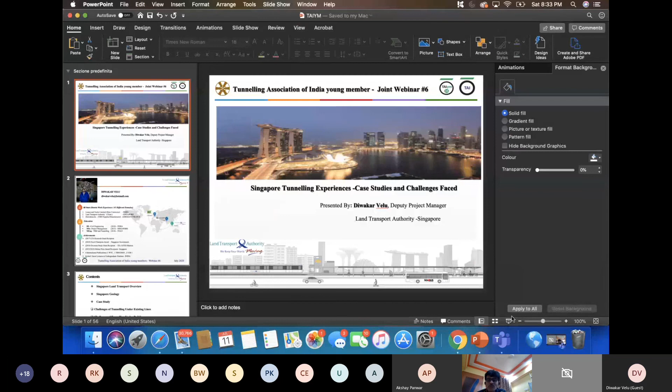Okay, basically I'll be sharing some of my Singapore tunneling experience. I've been in Singapore for the past 7 years, and as Akshay mentioned, I've been a part of these 2 critical projects in Singapore. So I'll be sharing some of the experiences from those 2 projects because I find those 2 projects to be keen in terms of Indian perspective, because it's based on a city-oriented location where there are a lot of challenges that you have to face and plan before you execute the tunneling works.

I'll just skip my introduction because I think Akshay has given a very good introduction. I've been for 8 years over in Singapore, and I've completed my BE in India and master's in Singapore as well as a master's in Turin. So that's the basic thing.

So I'll just go over to the next slide. The contents which I will be sharing today: I'll give an overview of the Singapore Land Transport Authority and what we do, what is the Singapore geology, because you need to understand what geology we have here and what are the challenges. Then I'll start with 2 case studies. One is, as Akshay mentioned, going under a parallel existing line, and another is tunneling under old shop houses which don't have any as-built foundations, and we have to look at the challenges going under such sensitive buildings.

In Singapore, they treat those kinds of buildings as historical buildings, and they don't want to disturb the architectural effect or damage those buildings. So it was a very challenging project. I'll touch on some ideas on how we managed those projects. In that, I'll cover what design we have taken, what mitigations were used, and how we tunneled under, along with some of the instrumentations which helped us manage those projects. I'll share those results.

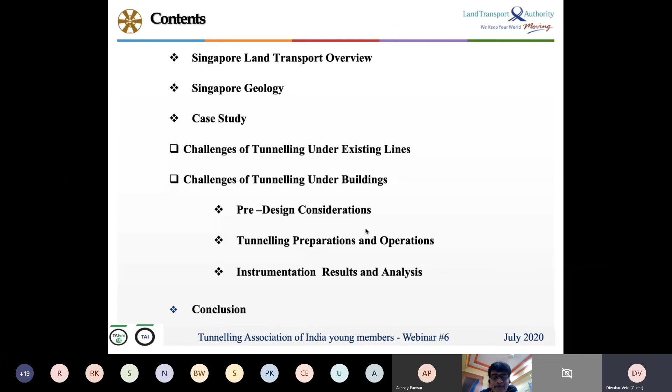So you can understand how the ground behaves for this kind of tunneling work in Singapore context, I'll conclude later on whatever we have seen. So basically, I think many people would have seen this.

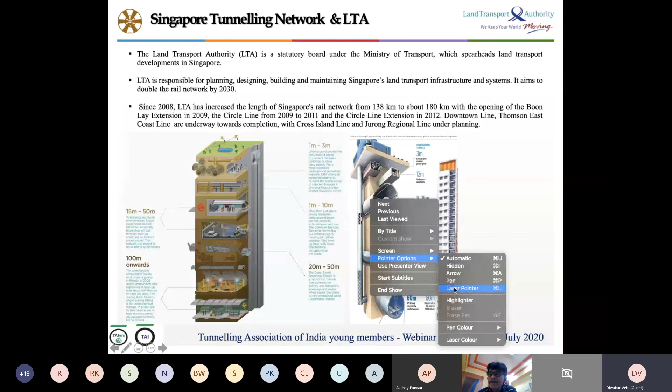This is Singapore's typical underground map. So we have about 50 meters below until there, we have tunneling. I think last week even Senthil would have shared the same thing. So basically, I am working more towards the metro lines, which are somewhere here. We work around 20 to 30 meters here, and most of the metro lines are in that area. The deepest is the Singapore power grid tunnels, and in between those are the deep tunnel sewerage systems.

So basically, this is a typical cross section, and whatever projects related to each authority, they mine under this kind of depth, so we don't come in contact with each other, and we have enough cover for the future lines. So typically, this is a cross section. If you can see here, this is for the utilities, this is for the road tunnels, this is for metro, and here is for the power grid tunnels.

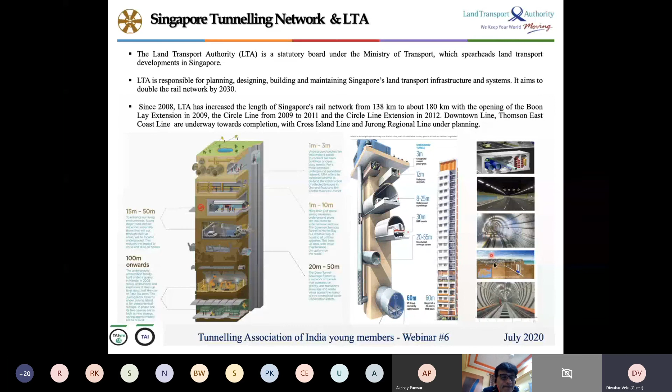Going to the future, what we can expect in Singapore, I wanted to share. We are expecting about 360 kilometers of metro lines. I am part of those lines. We have 2 new lines coming up, and also 3 extensions ongoing. Singapore is in a mindset that in future, every person within a 10-minute walk should reach a bus station or an MRT, so they have a very big plan ahead of us. We have a lot of job here, and it's going to be quite challenging. I wanted to share how Singapore is being prepared for future population and future developments going on.

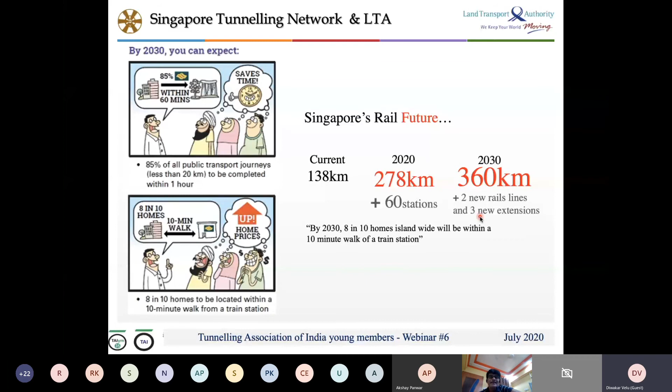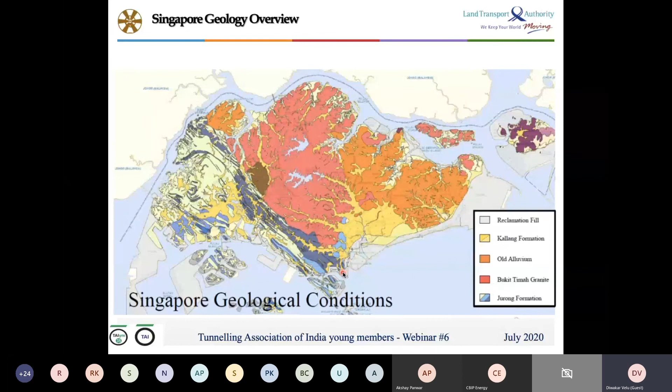You can mine very well here. This is more of a stiff clay, we call it OA, so this is a very good ground to mine in Singapore. If you get a project here, we'll be the happiest person to do mining here. Kallang, and this is the central business district, which is mostly reclaimed land, so this is a very challenging location to do a project because it's very, very soft, and majority of projects done here have to do a lot of ground improvement before we can start any projects there. So I'll give you an overview of how the geology looks in Singapore.

You can see this OA is more like a stiff clay, easy to mine, but it's a little abrasive, so you must be very careful with your cutter head selection and tools, and monitor very carefully. Though it's good to mine, you get a lot of abrasion on your cutter wares. This is the Kallang formation, a very soft clay, and you can just sweep in and go, you can hit about 15 rings per day. This is the Jurong formation, so it's kind of weathered rock.

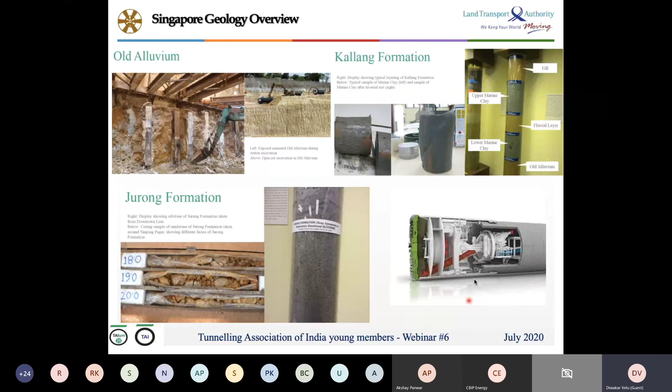So it is still good to mine, but you cannot get that much penetration rate. You have to carefully mine because sometimes it's weathered, sometimes it's good, so you have to be very careful. Mainly in these three kinds of geology, we choose EPB machines.

Coming to the next part of the geology is this Bukit Timah granite, weathered and full face Bukit Timah granite rocks, around the north side of Singapore. These are very good rocks, and mostly we choose slurry machines for this kind of project. So now you'll have a better idea of what the geology is in Singapore. These are the 5 main geologies which are more predominant in Singapore, where you have to design the tunnels for this kind of ground.

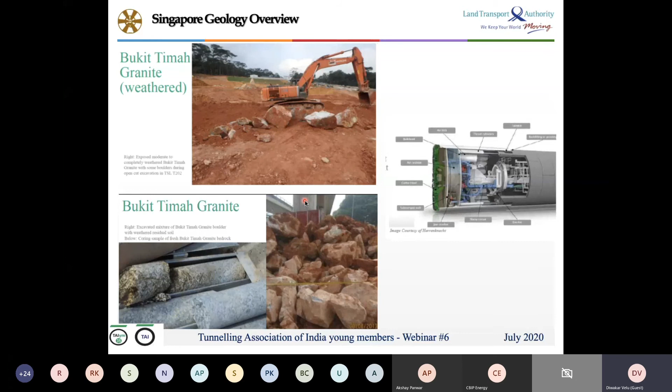The last one is the reclaimed land. This is how Singapore's reclamation, the central business district, was looking long back in the 90s, and now it is what you see, the typical CBD district of Singapore. This whole area was a swamp, and they had to fully reclaim the whole land.

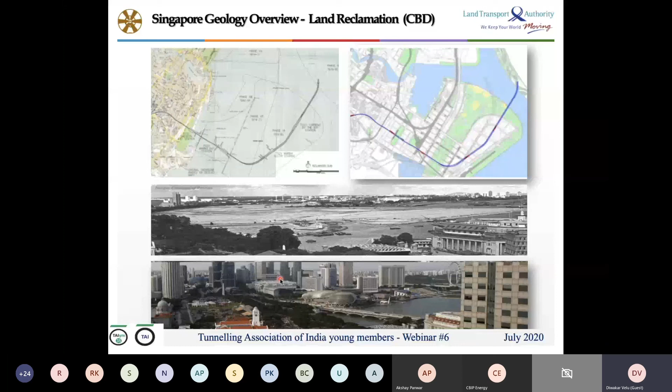Majority of the offices are here, and majority of the interchange of all the lines are here, so this is a very, very challenging location to tunnel and do station construction. Not only tunnels, even the station deep excavation is very difficult and challenging in this kind of ground in Singapore. Now they've already got a lot of projects done, and we have quite a lot of experience. Even recently, we have done ground freezing also in one of the stations. It's been quite a challenging and experience-rich set of projects held at the CBD districts of Singapore.

To give you a typical history of tunneling in Singapore, we have so many metro lines, and we've got about 173 TBMs, and we've mined about 229 kilometers till date. Now we're going to reach about 380 in the future. Singapore has till date used about 173 TBMs, and currently the CCL6 and NELe projects are ongoing.

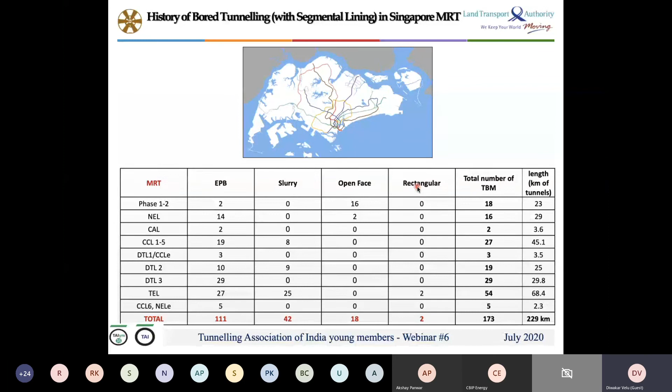We have used 4 kinds of machines: EPB, slurry, open face, as well as rectangular TBMs, which many people would have seen because it's been talked about worldwide and was one of the ITA finalist winners 2 years back, I guess. Okay, coming to the case studies here.

I'll mostly be touching on the Thomson Line project where I worked, and I was part of civil team 4 because I was working for Outram Park Station, which is an interchange of existing 2 lines, one coming from the north and one from the east. This will be serving as an interchange station in future. We completed that. There we had quite a challenge where we had to mine under an existing live line. I'll share about that in the coming slides.

As I told you, the north part of Singapore is mostly hard rock, so we use slurry machines. These are some of the cutter heads that have been used in the north part of Singapore where we started with the Thomson line, mostly slurry machines over there.

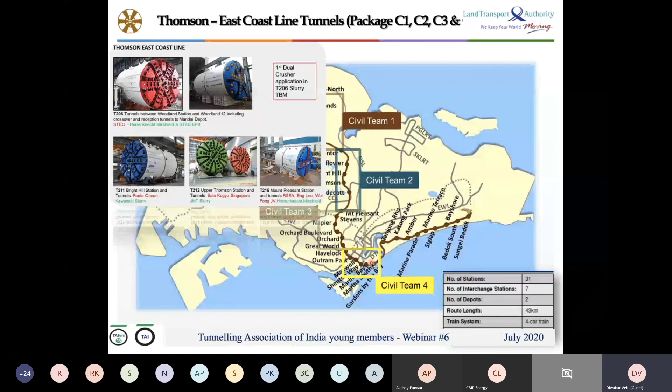Coming to the bottom where we are entering into the soft ground reclamation land, the Jurong Formation, we chose EPB machines. I'll be talking about my project, T222, done by Korean contractor Daelim, which was successfully completed, and we're going to open it soon, maybe in a year or so, depending on how Corona evolves.

You can see roughly how the opening ratios of the cutter head have been spaced compared to the rocky conditions and soft clay. Usually you need a better opening in soft clay so that you can get better penetration and mining.

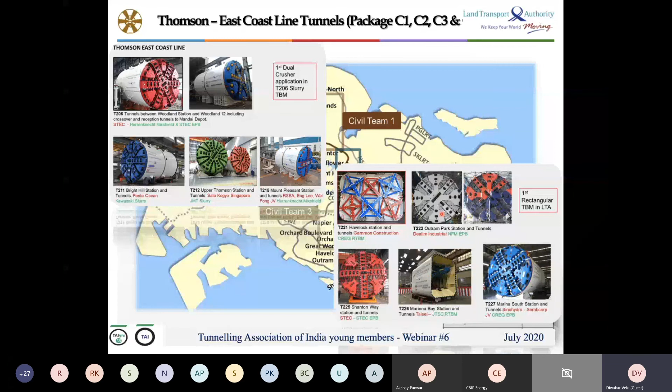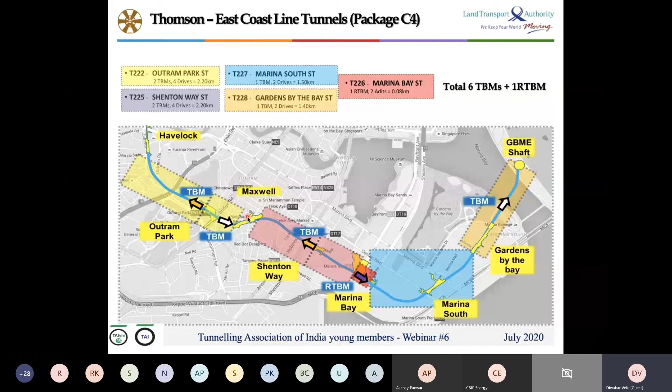This is civil team 4, which I was a part of. This is the CBD district, and we had 5 projects here, and I was part of this Outram Park station where we had to mine 1 TBM towards Havelock and 1 towards Maxwell station. That will be the project and case study which we'll look into in the coming slides.

So this is a typical layout of the station which we are going to study. I think even Senthil had shared earlier, because he was also part of the project. He was talking about a mine tunnel in his previous session.

Now I'll be talking about the bore tunnel stretches in this particular station. As you can see, this is a very congested area. There are pretty small shop houses here, where we had to go parallel and stack and dock into the station. The other two tunnels - this green one is an already existing line.

This is the oldest line in Singapore, and you can see we are going parallel under this line, curving into the new station, Havelock Station. So this particular stretch will be an undercrossing, going parallel under the existing line.

So I'll be talking in detail about those areas and some of the stakeholders, because stakeholders in Singapore are very important. They are key - we cannot avoid them. Here we had to deal with a lot of stakeholders.

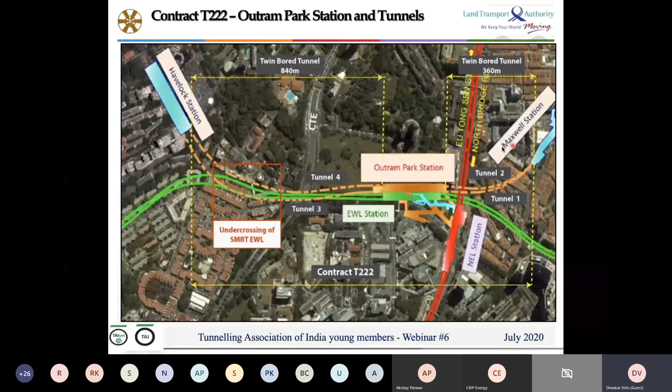One was the operator themselves who were operating the MRT above. And here we have Singapore General Hospital - a major hospital in Singapore with quite a lot of people. And these are pretty old shop houses. People who own shop houses are among the richest people in Singapore. So you have to be very careful with the stakeholders when mining here.

And here we have some hotels, big hotels, that we also had to take into care, because we are mining very close to the buildings, and any sensitive structures we need to keep informed.

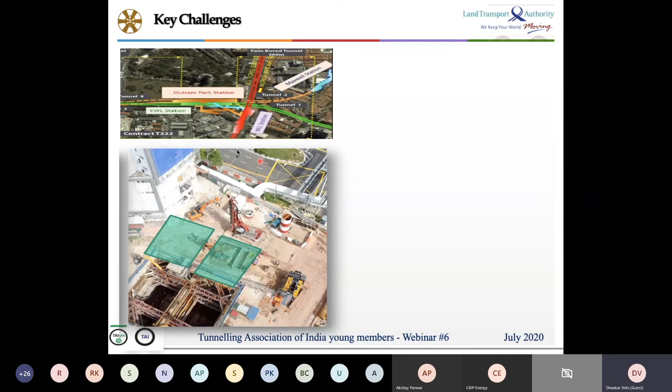This is a station. So what I wanted to share here is basically how tight the shaft is, because we are in a CBD district, and generally in Singapore there's a big issue with space crunch situations. So we have problems having a bigger shaft, we cannot have the luxury of launching a TBM finely - we have to launch in very small locations, and also go under immediately when you come out of this.

when you come out of this. Hello. Yeah, you are audible, sir. Somebody has put on his mic, so I think you can continue now.

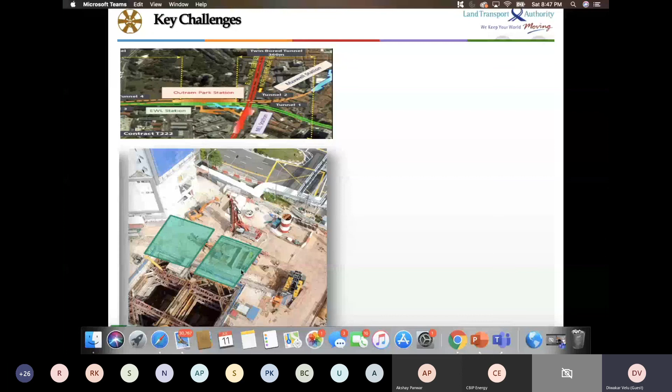So as I was talking, in Singapore, the space crunch is the biggest issue, so we had to launch in very tight situations. As you can see here, this is a typical layout of our site, and we have to launch a machine exactly under the road immediately when we come out.

And in this case, we had an issue where we had to tear down a part of this building because there was a pile which was obstructing the tunnel, so we had to take down the pile before we could mine through.

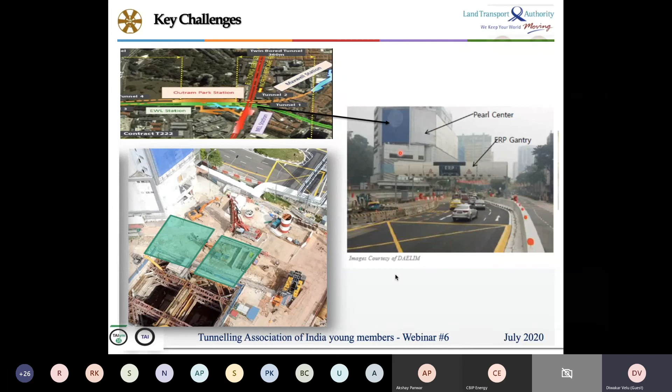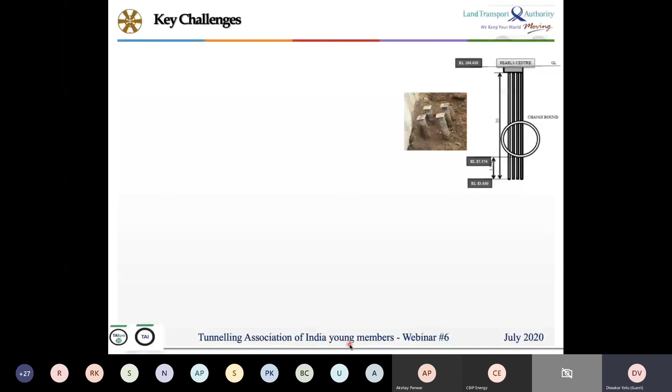So this is the Pearl Center, and we are going to mine through where the pile was. We had to take out the pile so we didn't have to stop the machine and pull the pile into the cutter head. So we had to do quite a demolition to this building before we could extract the piles, and then we could start mining forward.

So this was one of the challenges when you have to mine in very sensitive business district locations. Imagine getting this pile into your cutter head - you will lose a lot of time. This is a major challenge in Singapore, because there are a lot of piles you have to take into account, then design and pre-design to remove this kind of thing.

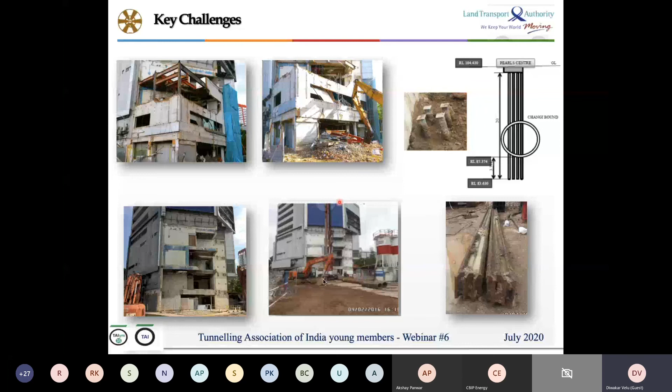So you must be prepared and plan very well to study the as-built drawings of these existing structures. As I told you, the critical challenge of our project is going under the EWL line. As you can see, we are going under the EWL line, and the closest distance is about 2 meters, and the farthest is about 8 meters. So we will be going at a gradient from 2 meters to 8 meters when we launch from the station.

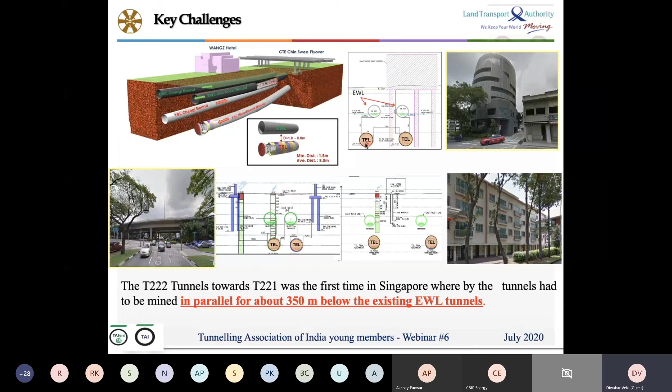In addition, we will be going through between the piles of a famous hotel called Link Hotel, and also another hotel called WANGZ Hotel. So you can see here, this is our new line, and we'll be going in between the two piles. And here we have the CTE flyover, and we have to go below the flyover.

And here we had another hotel, a very old 4-story hotel, and we had to go very close to the piles of this hotel also. In all these three sections, we are going under the EWL line.

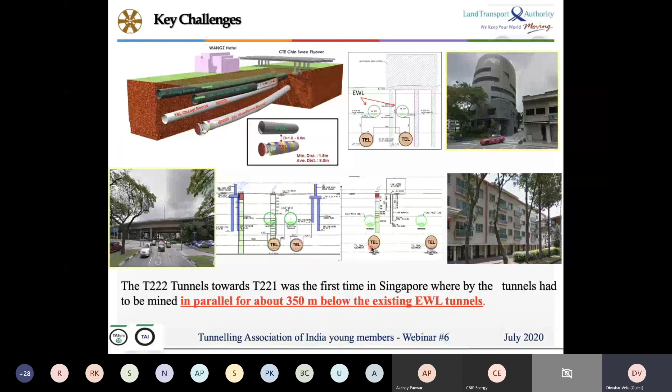So we were going under the live MRT. That was a really challenging thing, because we are putting a lot of people at risk above, and we had to take a lot of care to manage this project.

So I'll just quickly show what is the geology, which I have already shown before. Here we term the geology in terms of S3, S4. Each Jurong formation and the granite we divide further to better assess and plan for the tunneling parameters.

So in Singapore, that is a very important thing to note. Not like in other countries, where you have a uniform ground over your tunneling length, here we have this problem of going through mixed faces depending on location. That challenge is very difficult to manage, and we have to carefully assess those kind of things.

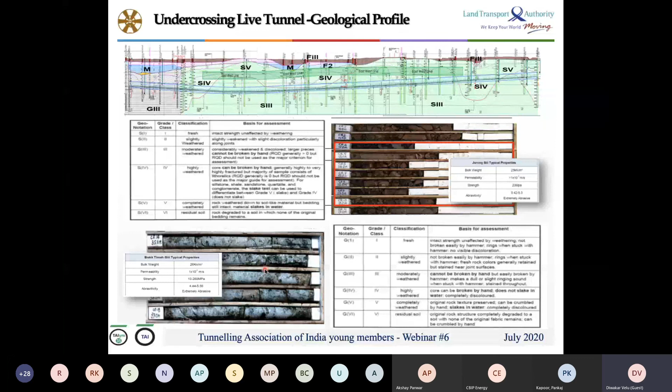As you can see, from a fully weathered rock you're going to hard granite, full face granite. So you have to plan very well when mining in that location, so that your tools are not damaged and you don't get your TBM stuck there.

So as I told, I'll just quickly show you the cross section. As we come through the station, we are going under a box tunnel, which is about 164 meters in length. Then it's a box tunnel with a crossover above us. Then we have about 312 meters of bore tunnel stretch, where we'll be going under the existing EWL bore tunnels.

So with the box tunnel, the risk is a little bit lesser, but when you go under the bore tunnel, it's quite challenging because you cannot allow the tunnel to move beyond a certain limit, which has been calculated through design analysis. That will be the challenging part in this project.

As you can see, the majority of our work is going under this weathered Jurong formation. One key thing to note in Singapore is that you have a lot of fill layer on top of this. So even if the EWL existing line is in good ground, there is also a problem to tackle surface settlement. That is another challenge we had to face in this project, which I can show in the later slides.

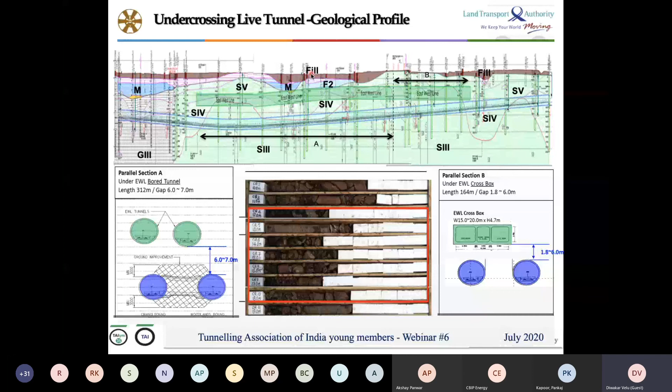What are the mitigation measures we took? Some of them were additional soil investigations, because we cannot do them exactly above the tunnel since there's an existing tunnel there. So we had to do additional investigation nearby to understand exactly what the geology is.

And for critical structures, we had to do some seismic investigations to ensure that the pile length in the as-built is the same as expected, or if it's differing, make sure we don't encounter an obstruction and get some delay in the project.

We also have this practice of, before crossing and after crossing, doing a cutter head intervention, so that we can undercross the structure without any stoppages. If you go continuously and find something wrong, like a tool getting damaged, and then stop under a structure, it's a big risk. So we have a culture where we ask the contractors to stop and check the tools before we go under any buildings we undercross. That's what we followed here also.

And we rely mostly on real-time instrumentation monitoring. For all the structures which are critical, we put up real-time monitoring, so we get a live feed of what the movements within the structures actually are.

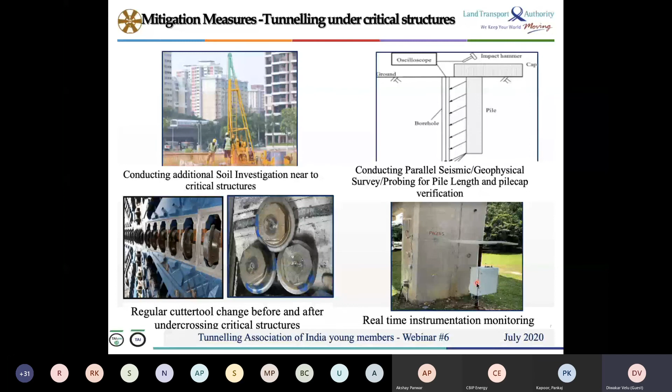Design aspects: the design was done as a design-and-build contract, so we had a pre-design done by Arup, and the contractor's QPD also, in this case GC Singapore.

Here the key thing to note is that we have to consider the tunnel above us. So they took 10 limit states, which I think Senthil has already shared in the previous session. Mostly these 10 limit states have been considered for the analysis. The first 5 are basically on the tunnel structure itself, and the remaining 5 are on the track gauge itself. We should note that even if the tunnel moves, and the gauge, you have to interrelate and see how much the movement is.

It is not necessarily that the track moves means that the tunnel is moving. So there was this difficulty which we had to assess very carefully, because the limits allowed is 15 mm, but some of the locations where the twist is measured, they only allowed 1.5 mm of twist for the operating tunnels. So it was quite challenging to get a relation between the two, because even the movement of the trains itself were causing some twist and changes to the gauge.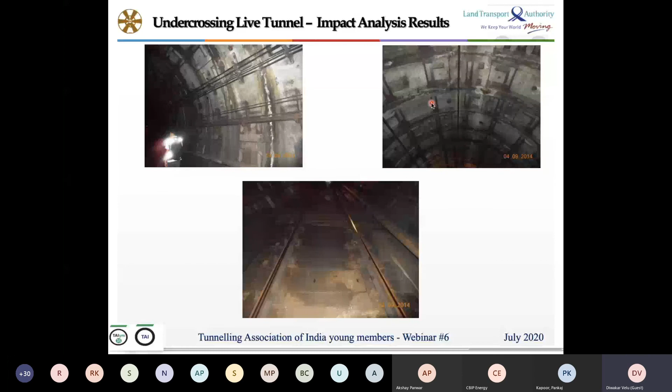So it was challenging to manage between the operator and our contractor to coordinate this analysis of the instrumentation readings. This was, as I told, we were going under a very old tunnel in Singapore. So you can see the structure, how it is.

Based on analysis, the consultant had given us that the allowable limit is 15 mm. And in some locations, they even told us that because the structure is very bad, the settlements could be even more. So we had a very challenging project ahead of us, and we had to control the parameters very well.

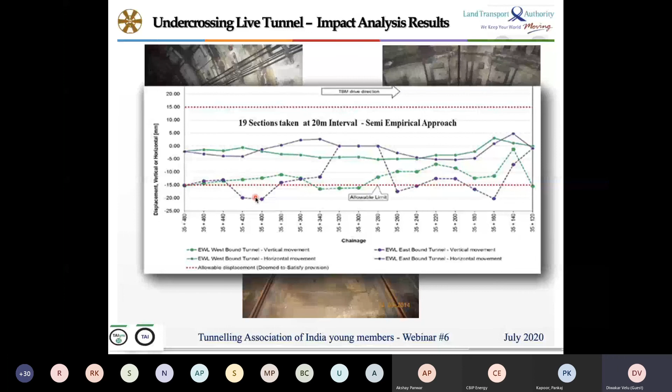So this is a basic design that was done for the EWL tunnels. And how do we manage the settlements? We needed a very robust instrumentation regime inside the tunnels.

As I showed earlier, the 10 limit states - for all these 10 limit states, we use these instruments to monitor the movement, and according to design, to monitor and see whether we are within the range of good mining.

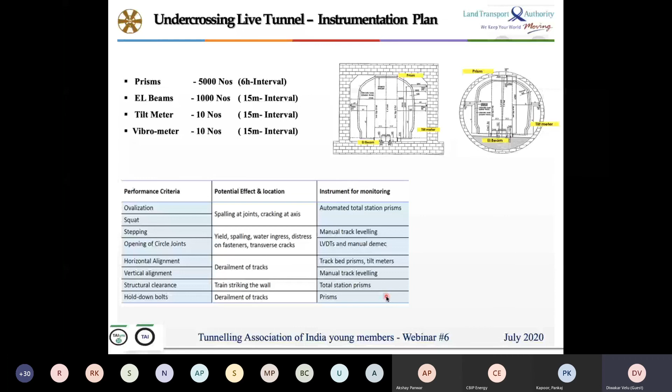So this is a typical scheme, because every night we had to go in and check whether everything is good. Usually the tunnels are not operated between 12 to 4. So we go every night between 12 to 4 to have a look at the whole stretch where we are, go under the particular stretch, and take a good look at the structure to ensure the next day's operation is not hindered or something like that.

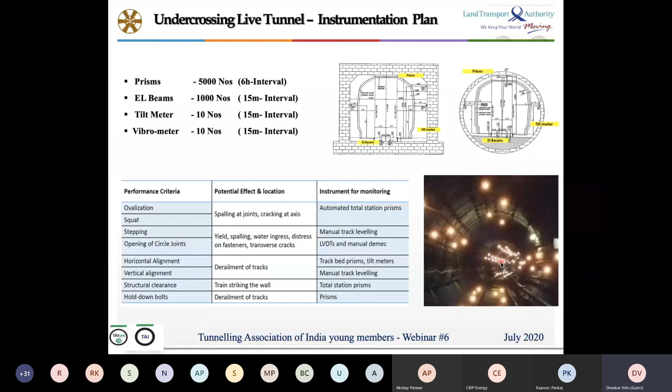So we have to pre-alert the stakeholders. That was quite a challenging thing to manage when we were doing this project. This is a typical instrumentation layout.

As you can see, in Singapore we generally do an influence analysis, so-called 25 meters ahead of the TBM and 50 meters behind the TBM. All the instrumentation within the TBM influence zone, we get readings on a daily basis, and the remaining ones we take on an alternate basis.

This is the scheme which we use, because we find that this particular zone is a key zone based on previous project experiences - that the TBM's influence is at this particular area, and it has been proven also. So we follow that estimate to monitor on a daily basis.

We get that, and based on the movements, we take decisions on site whether to stop or review or what to do next.

One more key thing apart from the usual project, when you're going under the live line, is to measure the track - so what we use is the track gauge. This is a small instrument that we put on the existing rail every night, and we run it over the 350 meters which we mine through, and we get the values.

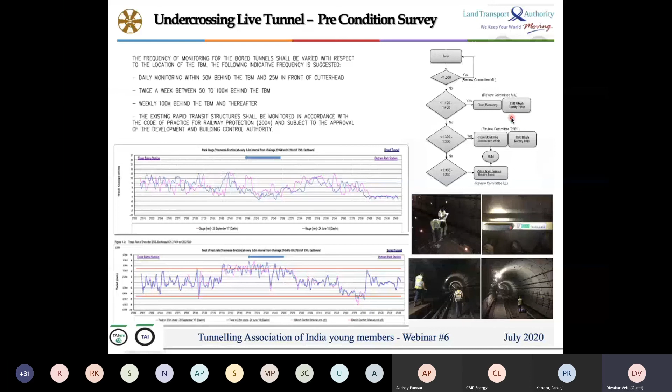This is one of the key things we had to do on a daily basis until we undercrossed the whole existing live tunnel. We put up a flow chart where, at certain levels on the twist, when we breach, we either reduce the speed or take other action, decided by the operator depending on his assessment. So we had close coordination with the operators to make sure we are in good shape and not affecting the operations the next day.

The other thing I mentioned is the stakeholders. We have a few other stakeholders around the tunneling stretch. One of them is the hotel, so we had to engage them. Any complaints, we go and talk to them, make them comfortable, because they have the right to stop the job if we are not answering them properly. Singapore is very committed to stakeholders, so we do very good stakeholder management.

As you can see in this picture, being an old tunnel, we went to an extent to ensure all the fasteners are properly held, because even if the fasteners are loose, the gauge readings would be different, which might trigger an alert and we'd have to stop and review all the parameters again. So we worked with the operators to ensure all fasteners were replaced and put new, so we can confidently mine under the tunnels without any problem, because the train must not derail - a big accident would cause fatalities. So we had to take extra precautions.

The other thing is we also have a project information center set up at each project, so people can come and see what the project is, and we give them all the details they ask for and make them aware of what is going to happen. We engage them on a monthly basis. That is how we keep the stakeholders engaged, because they are key to a project being run successfully.

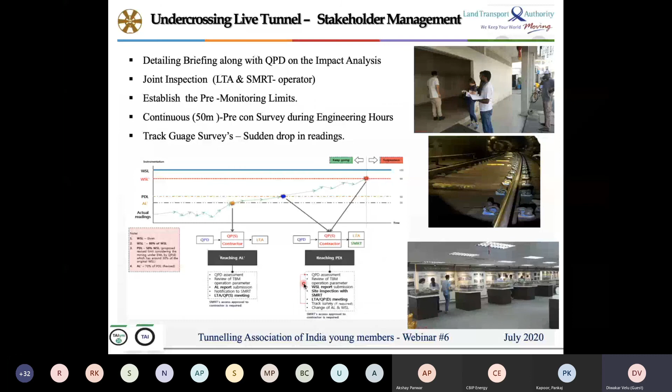In Singapore, the other problem is that we cannot lift the TBM once we finish mining. Generally, we dismantle and bring it back through the tunnel, because we don't have a docking or receiving shaft facility, and in most situations the stations wouldn't be excavated yet - we'd be reaching first while the station is still at the first 10 meters or so. So mostly our dismantling happens within the tunnel, which I'll share later to give you an understanding of what I'm talking about.

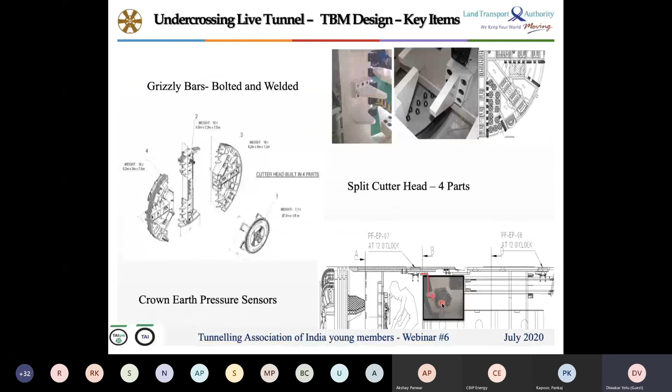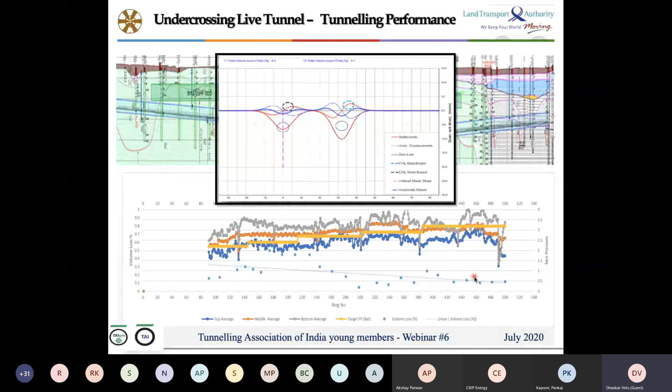This shows we've done quite consistent mining throughout the project. This is for one tunnel I'm showing as a reference, and this is the design consultant's impact assessment. The predicted volume loss was around 0.5 to 0.7%, and we were well within 1% volume loss. You can see the blue dots, which are the actual volume loss occurring. We were lucky that the ground was quite stable and we could manage tunneling under the EWL without any issues.

Coming to TBM excavation management, we are very particular about how much soil is being excavated. We always keep a plus-minus 10% excavation volume margin. We generally mine with the full chamber and don't allow the contractor to mine with half chamber. We ensure we don't go above 10% excavation - beyond that we consider it over-excavation and give warnings. So we are very particular about excavation limits. As you can see along the TBM under the EWL line, we were well within the 10% margin and excavated quite well.

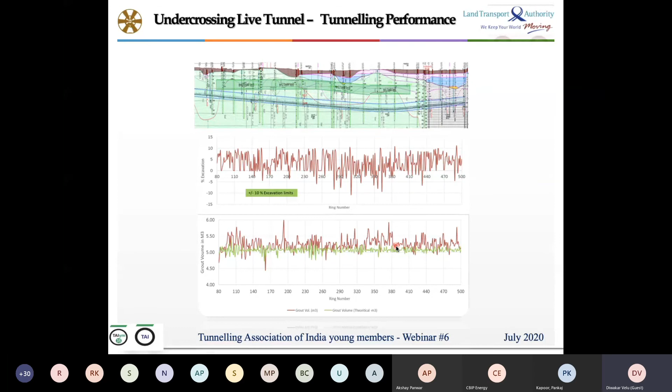The next graph shows the grouting limits, because we have to fill the grout of the overcut. We always ensure the target grout, shown in green, is what we pump in based on the TBM overcut. We ensure the contractor provides plus 0.5 meter cube more than the target, so we were well within or more than target. This ensures we've properly grouted everything, because we don't want any void causing trouble later. These are key parameters we monitor daily to ensure we've done a good job.

I can give you a rough feel of how the ground varies from one stretch to another. Under the EWL line, we went through this kind of rock. Managing this excavation based on the density used to calculate excavation volume was quite challenging. So for every 5 or 10 rings, we usually do a site density check, then estimate to ensure we stay within the 10% range, because it keeps changing due to the geological conditions encountered in the mixed face of Singapore.

The other challenging aspect is that during tunneling we do real-time monitoring - 24 hours a day, 3 times monitoring, when tunneling under sensitive structures. We also keep a 24-hour surface watchman when going under any critical structure, who closely supervises and informs us of any problems so we can quickly stop and alert the TBM operator. We also have a standby grouting rig that moves along with the surface watchman, so we can quickly tackle any cavity that has formed.

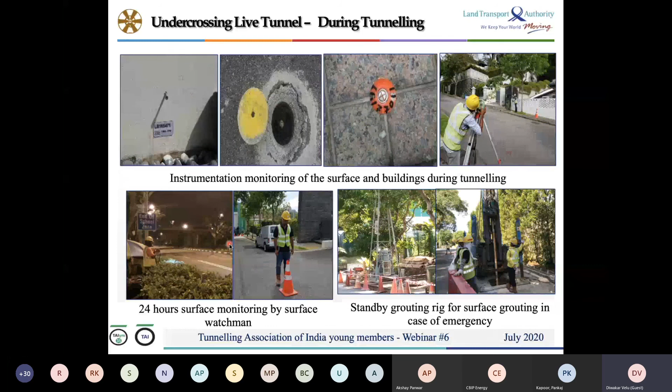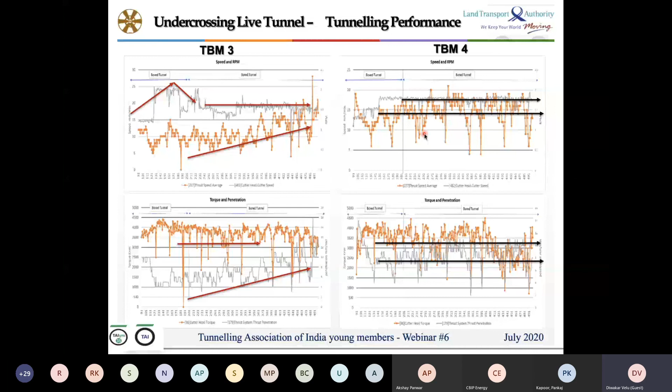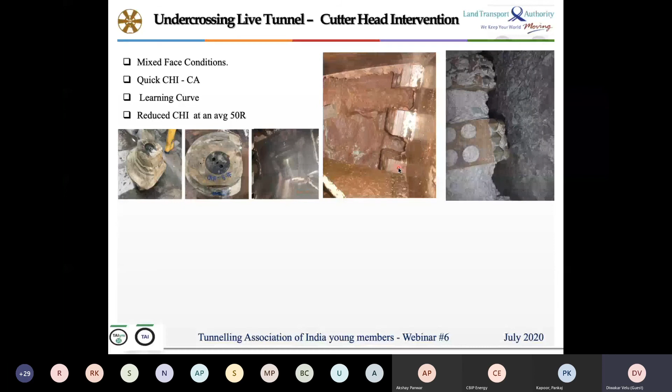This is a quick summary of the ground we were in. When we go for cutter head interventions, we take a sample of the ground and check the density as well. These are some photos we took. It was quite challenging, as I mentioned, this is a full face rock, and you can see we had damaged the whole discs.

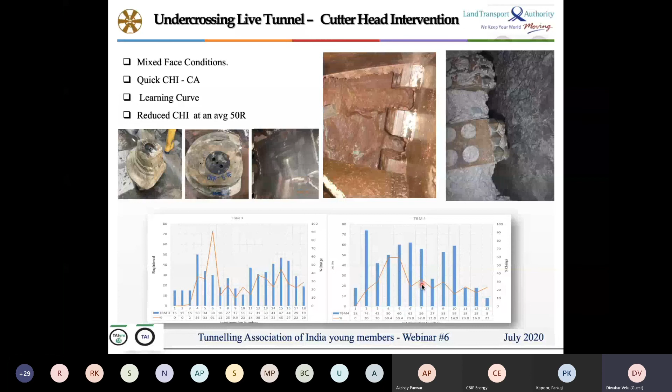For the first TBM, we had to do about 18 interventions. But after the second TBM, once we found the better torque and penetration rate, we actually reduced the interventions and got a better production rate. This shows how effectively the lessons were learned and implemented for the next bound of drive. We reduced the CHIs and were able to complete it faster.

We would lower it to free air, go in, and quickly change as many tools as we could in that 4 hours. So you can imagine 18 CHIs being done in such a case is really a very challenging job - it was like sleepless nights for most of us when we were going under this EWL line.

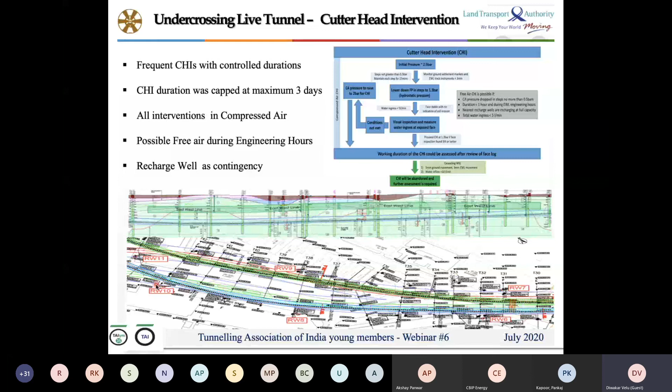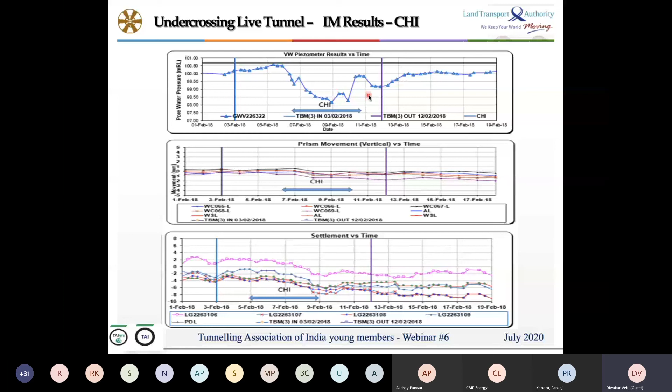So here's a typical example of what we did. The piezometers drop when you lower down the face pressure. You can see the prisms also within the live tunnel, going down slightly, and you can see the amount of settlement happening on the surface above the EWL line. So when you lower down your pressure, there was an impact on the surface too. We had to manage the EWL line as well as the surface, so we used recharge wells to pump in as much water as possible, because the Jurong formation generally doesn't take water easily. We tried to manage the situation, and it helped to an extent.

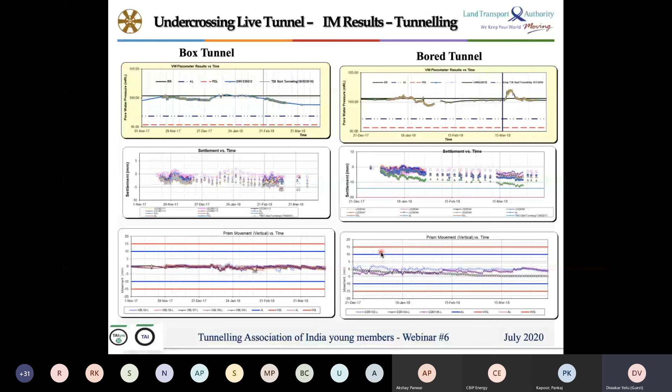This is a typical prism movement. Along the chainage, we had about 300 to 400 prisms put across the parallel line. We took a particular reading before the TBM passed the tunnel, and you can see the structure was not moving much. Halfway through, we took another sample and saw that the tunnel had swung up and down, but not much in between - about plus or minus 2mm, which could partly be gauge error, but it was quite stable. At the end of the tunnel also we were quite okay. We did cause some movement, about 3 to 4mm, but it's still within the tolerable range we expected. So I can say we did good mining under this particular stretch of ground.

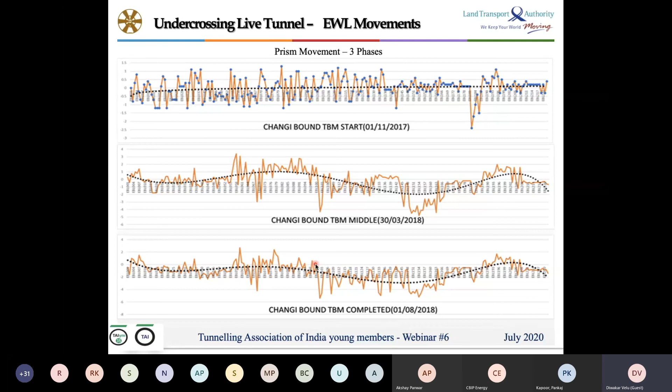Now I'll quickly jump on to TBM dismantling in Singapore. The challenge here is limited space - TBMs cannot launch in full. We generally do a launch shaft, mine the TBM for a certain extent, lower the backup, and then do the main drive launch. The other problem is at the station side, where usually we don't have access. So we stop behind the station, the whole TBM is dismantled, and we relaunch for the other drive. This is a typical scheme in Singapore's metro line.

This is also one reason why they use many TBMs here - they want to finish projects faster, so they quickly launch and finish. This way the tunnel's second phase works can quickly commence and be ready when the station is completed.

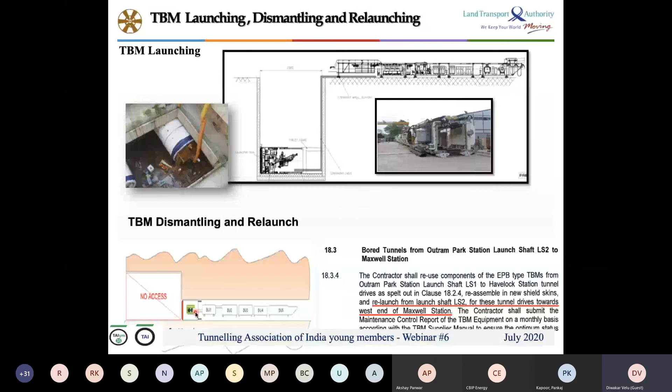Imagine dismantling a whole TBM inside the tunnel with such a small area to take it out. I'll show you a sample of how it looks from other projects - surrounded by condominiums and buildings, and we are lifting such huge structures. Usually we don't have space for large capacity cranes, so they do tandem lifting, where two cranes rotate the whole TBM and lower it into such a tight shaft. This is what you will mostly find in Singapore.

You won't get the leisure of a very big shaft with lots of room. Most shafts here are basically 20 to 25 or maybe 30 meters long. That's what you get in Singapore, because generally the shafts are backfilled again, so it's a waste of money to excavate a bigger shaft. And in Singapore, tunnels are launched first - before a station commences, we generally do a launch shaft.

So it is very important actually here. So how does the TBM being dismantled?

I'll quickly run through the steps. First we disconnect the backup gantries, pull out, remove the belt conveyor, remove the erector, screw, beam, motor, manlock, the cylinders, the intermediate shield, the drive unit, the front shield, and the cutter head. This is the general scheme which is being used, and we follow the same so that we are careful when we remove the TBM.

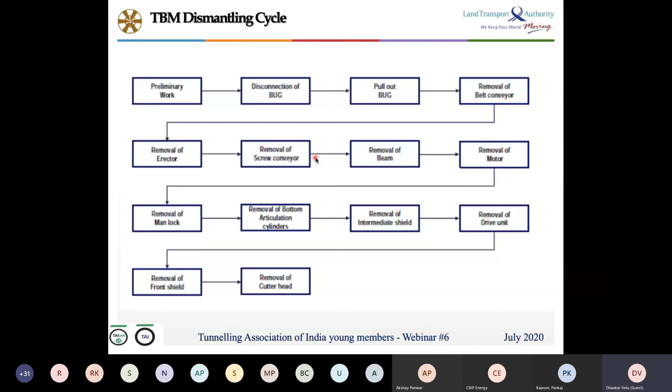I'll just quickly run through how it looks in a section view. As you see, the TBMs go docked behind the station wall. Then we start removing one by one. Here we are trying to remove the main drive and the screw.

Here you can see the screw support being taken away and the screw being removed. Here we take the main drive unit, so the beam is being extracted and sent out.

We use the locomotive to transfer everything outside the tunnel. Imagine a 1 kilometer tunnel - that is also a bigger risk. You have to transport the whole big components through the built tunnel actually, so that's another challenging thing.

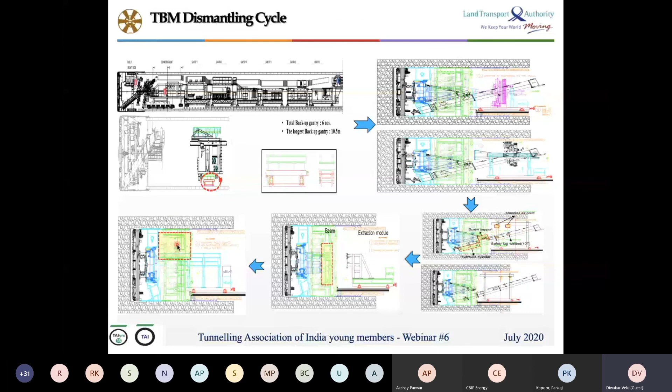Here you can see we are removing the man lock, followed by all the articulation jacks and the middle shield. So you have to remove all those in parts.

Then we have the cutter head. So we come to the bulkhead and the cutter head. As I told earlier, because we have to do this, our cutter heads are made into parts, so we can easily dismantle and reassemble for the next drive actually.

So finally, you can see after the main drive and the cutter head is done, we remove the cutter head in parts and it goes out.

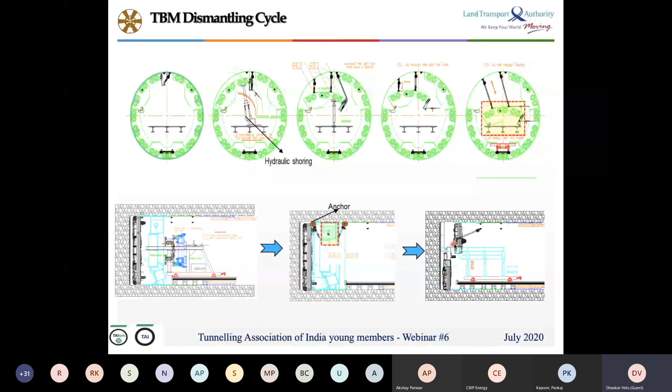So this is a typical view of the actual real view of what you're going to see when you're dismantling within a tunnel. This is a screw coming out, the drive unit, the man lock, the articulation jacks. You can see the bulkhead over here, the screw conveyor opening, and here you can see the final cutter head being removed. This is half cutter head, and this is the bucket, the full face rock.

Usually because when we dock, we have a grout block there, which is a slurry wall. So you can see a proper wall over there when we dock behind the station block actually.

This is a comparison of how many days it takes for the whole process. So initial launching, we target - orange is the target - and I've compared with 4 drives which we did there. So you can see again a lesson learned over here.

The first 2 drives always take longer time, but then after the people and the workforce get experience with how we do within the tunnel, they generally reduce the work. So we have these 4 setups: one is assembly, launching in short launch, then the main drive with the full backup, then the whole dismantling. This cycle is again repeated when you launch for the next drive.

So this is one of the major scope and challenge, risky work that we have to undergo when you're mining inside, rather than taking out the whole TBM as a block from the other side. It's much easier.

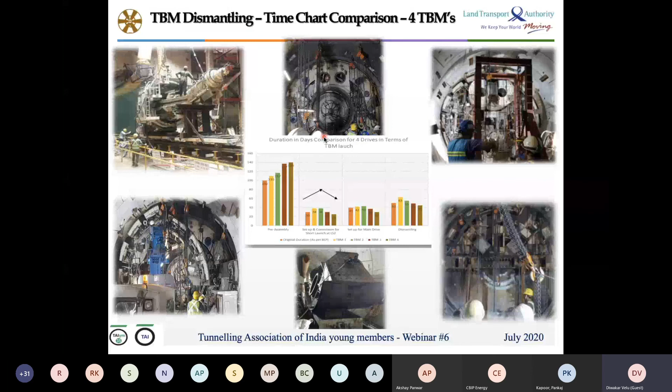The second case study is a short one. This is about going under the shop houses, so-called the architectural Singapore, very old shop houses over there. As you can see earlier, I touched upon mining in Jurong Formation. So here I will touch upon mining in OA and Kallang Formation here.

This is a station, a stacked tunnel. We are going 700 meters in old alluvium, and 350 meters of Kallang. This is a stiff clay, this is a soft clay. So we are doing a mixed face interchange at this location over here.

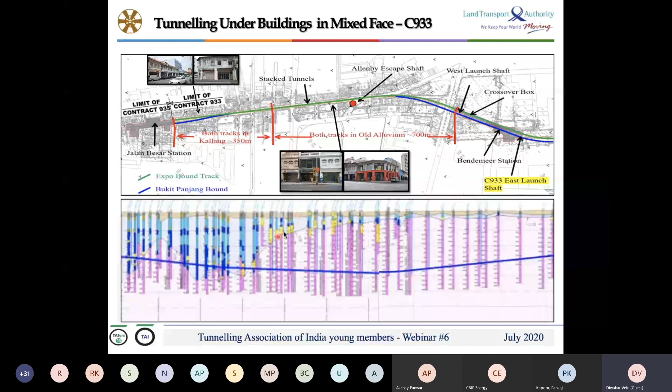As you know, this is a very old shop houses area. We had to do an extensive check on the as-built drawings. Our QPD and client sat together, and then we got all the as-built. We found out which has as-built details and which do not, and we demarcated, and asked the contractors on board to go and carry out their own investigations to ensure the foundation type, so that we can properly assess the settlements when they go.

The biggest challenge in these shop houses was that certain buildings were in good foundation, but there was a 5-foot walkway in front of these buildings.

Those were not in a foundation, so that was challenging, because they were settling more than the buildings themselves, causing cracks in the walkways. You can see the building here, and this is the walkway. These buildings were sitting on foundations, whereas this was not sitting on a foundation. So if this settled down, you'd get a crack here. We had to be very careful about how we managed this.

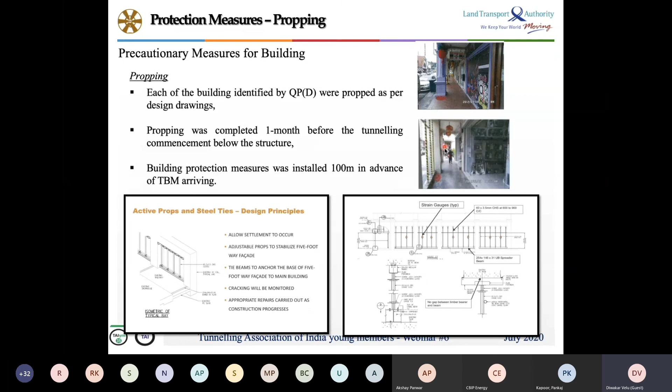So we introduced active props. They were put up about a month before, and we jacked it up to make sure it's intact. We also installed strain gauges so we could closely monitor the strain coming onto the building, then ask someone to go look and assess based on the actual condition. This is how the props were put up. You can see the whole alignment, props put up like that for the 5-foot walkway, where the building and the walkway are here.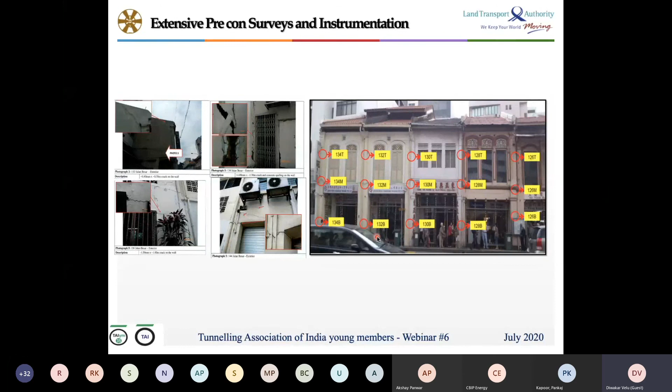So this is the shop house you can see here. You can see the props being put up, and we also had extensive tilt meters put across, so we could monitor the tilt, how it's tilting based on the 5-foot walkway and the building itself, because that was the riskiest and most sensitive area there.

Another thing we had to take care of when going under the soft clay was to ensure, because the soft clay of Kallang, generally when you mine through, squeezes in and locks the TBM since it's very soft, that the overcut being done is not squeezed in, so we don't cause consolidation settlement later. The settlement might happen later. So we had grout ports along the TBM, and we used to pump bentonite along the shield, so the bentonite acts as a medium between the overcut until the backfill grout compensates for the overcut, so the soil isn't displaced from its original position, causing further settlements.

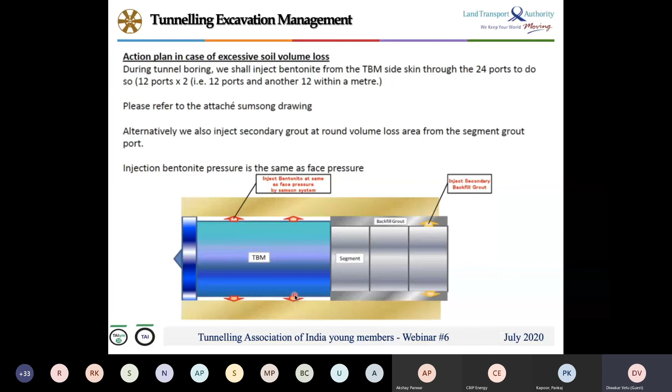We had about 24 ports around the TBM, 12 over here and 12 over here, and they were pumping bentonite at all times when we were mining through the soft clay.

You can see the face pressure. In OA, we were mining at about 3 bar, about 25 to 30 meters below. So you can see 3 bar is the pressure. And when we went into the Kallang, we went up to 4.5 bar. So you can imagine how soft the ground is. If you lower the pressure, your volume loss is going to be very heavy.

You can see in OA our volume loss was well within 0.5%. As soon as we entered Kallang, which is soft clay, it went up to 2.5%, showing very immediate settlements. So we had to manage the Kallang formation too when mining, especially the speed and penetration rates.

In OA, as I told before, it's also abrasive, so we had to do quite a lot of CHI to ensure the tools are in good shape. When doing critical undercrossing, we do a quick CHI — we stop every 45 rings, check if it's good, close one day, then start mining. That's why production is quite less on average in OA. But Kallang, being soft, is very good. At the same time, if you mine too fast in Kallang, your volume loss becomes more, so you have to manage how you mine in this soft clay in Singapore.

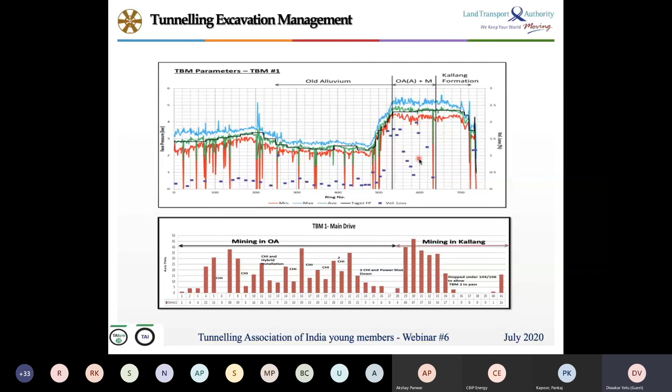So I'll just quickly share some of the instrumentation analysis. I'll take an example here — we have certain buildings along a road, and this is in OA. As I said, we had to stop here for quite a long time because this is where the TBM was stopped, and we put up the whole backup and launched the main drive.

So you can see the typical settlement graph in OA when both the TBMs came in and moved out. You can see it is more stable. So the ground is very stiff, so it can stand on its own. So OA is a very good ground to mine in Singapore actually.

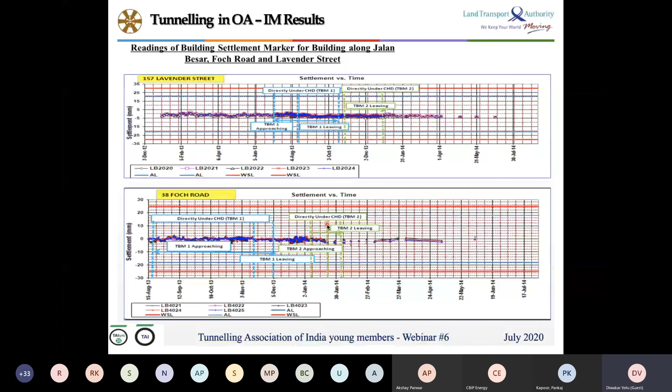So here also you can see another graph of another building marker, which is showing quite stable readings even after being stopped for say 45 days to 60 days to convert the whole TBM before we could launch actually.

For Kallang, as I told in the later part of the tunnel, you would have noted that we are transiting from OA to Kallang, so it's a mixed phase. So you can see here, this is the transition zone at a certain ring level. You can see how the settlement has dropped.

So we had about 15 mm drop immediately without doing anything. We didn't mess up or do anything, but the ground has settled. That is the design consideration of Kallang formation, that it will cause about 2 to 3% of volume loss. So that's how soft it is.

So we have to manage well when you are mining, especially with buildings on top. If there are no buildings, you're okay. But if you have buildings, you have to make sure that they are also in good shape. So that is a key factor when you're mining in Kallang and with buildings on top.

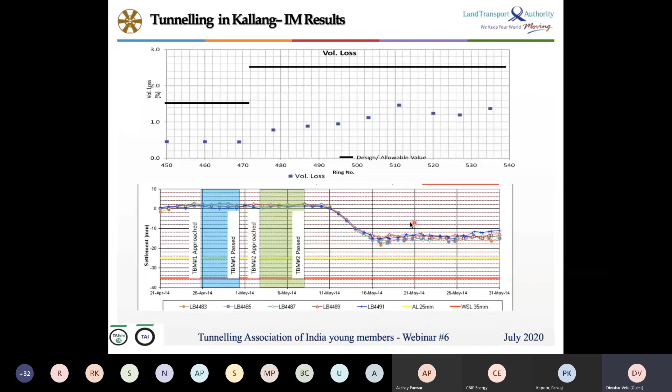And another thing here is this also causes consolidation settlement. So we cannot stop monitoring. Maybe we have to monitor for quite a longer time to ensure the thing is stable. That is one challenge we noted when we were mining Kallang formations actually.

So one inference which we got from the TBM excavations is that, like what I said before, 25 meters ahead and 50 meters behind the TBM. So you can see that when about 20 to 30 meters before a particular array we crossed, you can see the settlement starting to come. So we can say roughly 3D, 4D ahead of your TBM, you can start to understand the instruments are reacting for your TBMs that is coming with the face pressure over there.

Similarly, after your TBMs have crossed a certain instrumentation, you can note that until about 50 meters or so, you still have some settlements coming. So that's why we say that we have to closely monitor 25 meters ahead and 50 meters behind the TBM. So till we are satisfied that the instruments have not gone down further.

If they are going down, we have to go and quickly open up the segments and start, open up means drill through the segments and do secondary grouting to ensure we stabilize the instrumentation reading. So that is how we mitigate the settlements in Singapore actually.

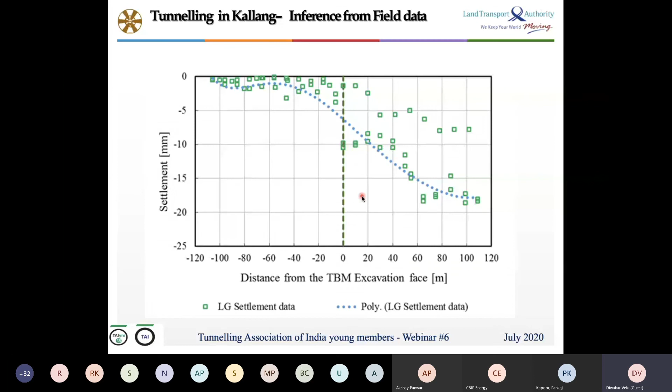So coming to the conclusion, as I told, when you're mining through critical structures, you have to understand the whole structural conditions' impact both to the surface and also to the in-between, whatever the piles or tunnels are there. You have to understand both, and you have to manage the tunneling works over there.

Now we are also considering putting up strain and stress load cells to understand, because we are going to undercross a few tunnels in future, and we want to put this also and check how we can manage from the results which we get.

And when we are doing undercrossings, we must be effectively coordinating. So one good thing to manage stakeholders is doing a very extensive precondition survey, so that we know what the condition is and we can design based on that, so that if anything happens we can come back and relook, and then we can effectively coordinate to understand how we can improve. Like in the case we went and replaced the fastener, so that it was a better thing, so we coordinated very well.

Now in future, for live undercrossings, we are asking the operators within the train to install certain cameras and laser units that can automatically measure the twist and gauge, so we don't have to run these instruments inside the tunnel. So we are directly looking at that, so we have real-time track measurements which we are considering for future undercrossings.

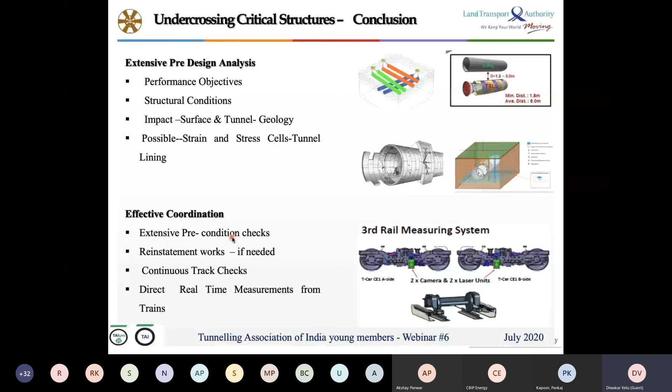When you're entering mixed ground like this, your majority is in soft rock, but you won't know you're fully entering a full hard phase until you go halfway through. By then you would have damaged half of your cutter tool. So it's always better, when transiting a mixed phase, to lower your penetration rate and mine slowly. Once you assess you've really gone into bad ground, then you can mine accordingly. That will help save a lot of cutter head interventions.

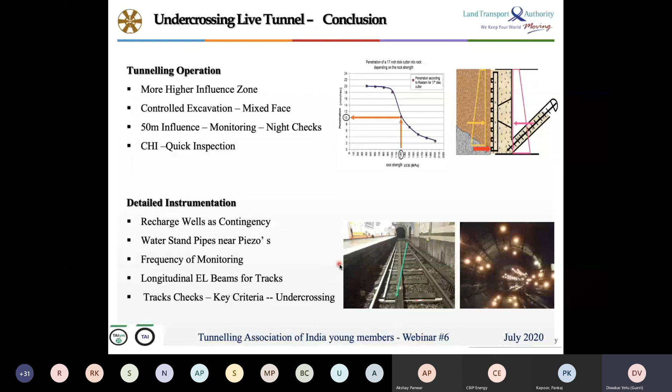Another important thing is detailed instrumentation. We had very extensive instrumentation which helped us. One thing we'd like to look at in future is putting in water standpipes. We didn't have that here, so we couldn't assess how the water level was behaving when we were lowering for cutter head interventions. We were depending on the inflow or seepage coming into the cutter face to measure. So we're looking at putting water standpipes, and also increasing the frequency of monitoring. We're also seeing the EL beams being put parallel - it would be better to put them in a transverse location when mining parallel, for better understanding. So these are things we're looking at in future to improve the monitoring aspects of tunneling works.

To conclude, we are now looking into innovations and other things. I want to touch on a last slide about innovations. In Singapore lately, we've been looking at a lot of innovative technologies to improve productivity and efficiency of the workforce.

One of the things we considered, which I wanted to share, is when we break through, as I was explaining, the TBM had to be dismantled, so the shield of the TBM is left over there. Afterwards, for this particular stretch, we have to do manual casting - meaning manual shuttering, tying rebars, and then casting the whole thing. The best approach is always to break into the shaft with the rings fully built, so you don't have to do this manual casting. This manual casting is very challenging because it is a potential leaking point for water to come in.

So in Singapore, they also tried a new technology using a lorry fitted with an erector, which was able to do tunnel segmental lining after the TBM was removed. We completed the whole segmental lining up to the station - that was one approach. Here you don't have to put in labor, and the joint integrity is good. You can do secondary grouting later on. It was one of the good solutions from one of the contractors.